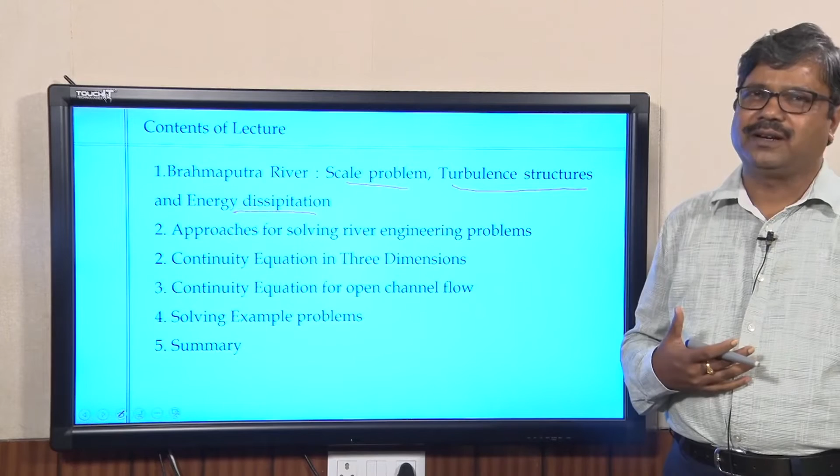Now let us come back to today's contents. We will start with the Brahmaputra river concepts, where I will talk about scale problems, turbulent structures, and energy dissipation, which are very complex processes. Before deriving the basic equations, let us learn how complex river flow is in terms of hydrodynamics, sediment transport, and nutrient transport mechanisms in a natural environment like a river.

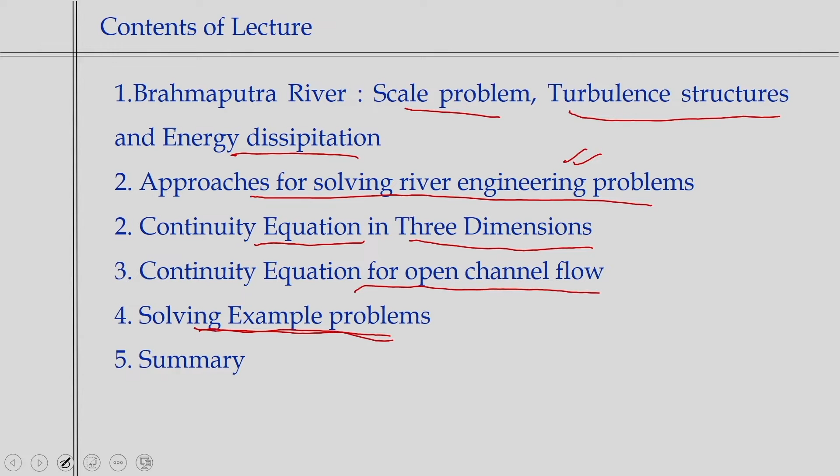That is what we will discuss in more detail, how we can solve these river engineering problems. Then there will be derivations of the continuity equations in 3 dimensions, the continuity equations for open channel flow, followed by a series of problems to give you confidence in understanding velocity fields and water depth variations through solving example problems on basic mass conservation equations.

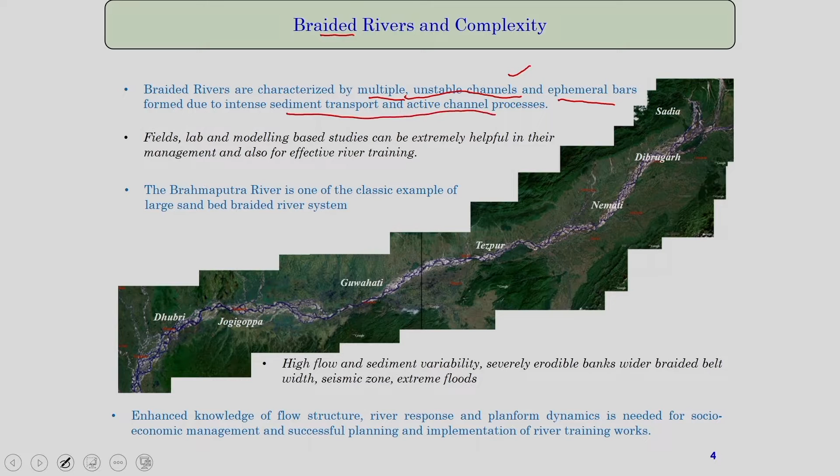Let us come back to the scale problems. We should have awareness about the Brahmaputra river, which we call a braided river system because of its multiple unstable channels, with series of bars or islands in between, where intense sediment transport and active channel processes happen. Looking at satellite data, the length of the river is close to 1000 kilometers, the width varies from 1.2 to 16 kilometers, and the depth averages 12 meters.

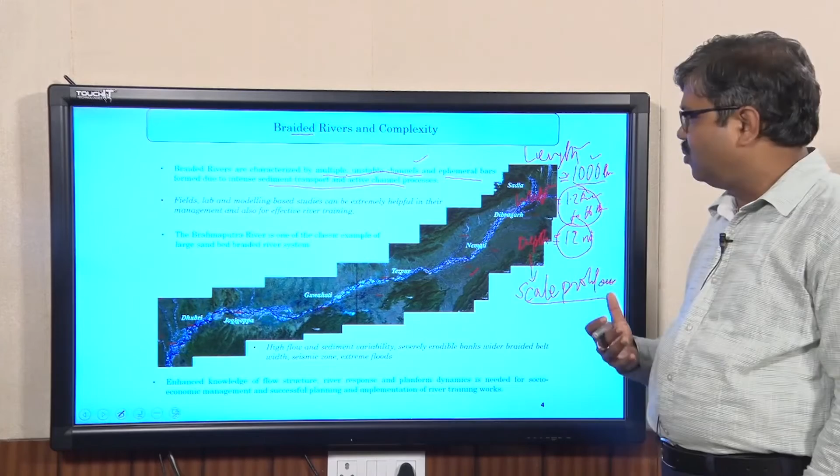So if you look at these values, the length is 1000 kilometer scale, the width is a few kilometer scale, and the depth is in meter scale. This is what we call the scale problem in river systems, because the dimensions of length, width and depth differ by considerable orders of magnitude. That's the reason we need a lot of approximations to solve these river problems. It's not simply a computational fluid dynamics problem; the major issue comes from these scale problems of length, width and depth.

If we look at classical examples of large sand-bed rivers, these figures show multiple dynamic channels with very high flow and sediment variability. That's why we should understand how these very complex flow processes happen. Again I emphasize the scale problem in river flow systems, because the length, width and depth dimensions themselves differ by orders of magnitude - that's the biggest issue.

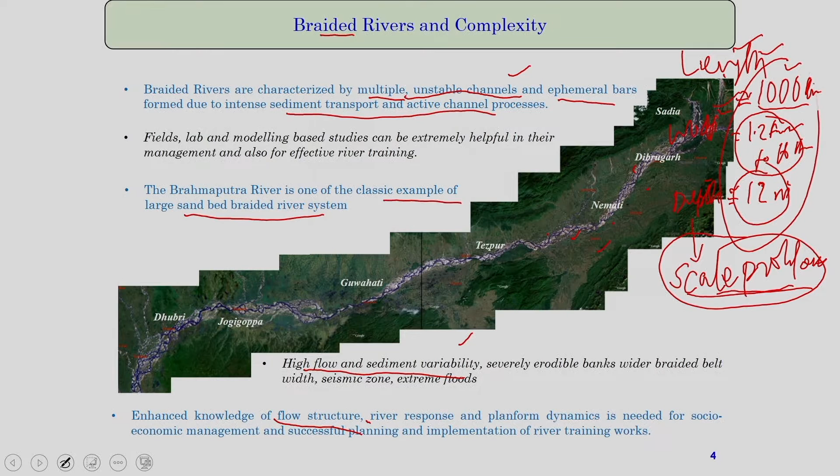Now looking at another bigger issue: if you take photographs of the Brahmaputra river during flood periods, you can see turbulent structures like vortex formations. Large vortex formations happen, including boil formations, where a vortex forms from the ground, grows, and then dissipates. These processes happen in the Brahmaputra river. Looking at a wider snapshot of photos, you can see a similar series of vortex and boil formations occurring - these are macro turbulence structures.

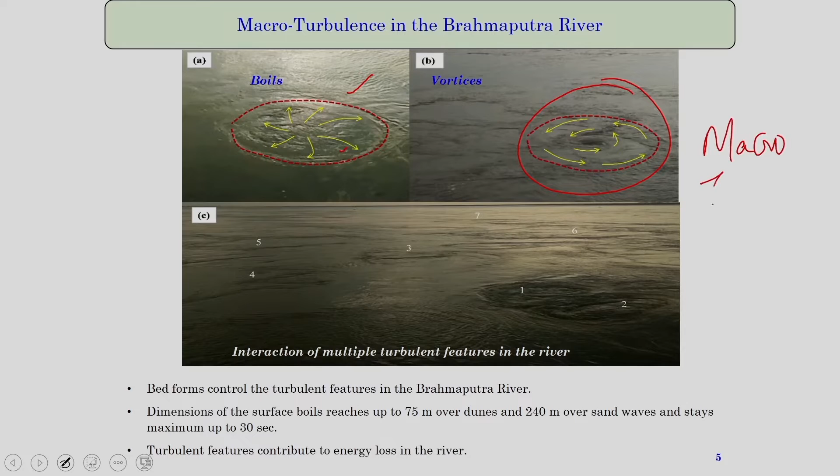These structures are also responsible for the flow behavior change, the velocity, depth, and also the change in sediment transport process. Because of the presence of boils and vortexes, this macro turbulence makes the sediment transport process different in terms of source, deposition, and transport.

These turbulent structures are visible in the Brahmaputra river during floods. They are also responsible for energy dissipation in the flow system. These macro turbulent structures are quite visible in the Brahmaputra river, but in other rivers you can also see smaller magnitudes of turbulent structures.

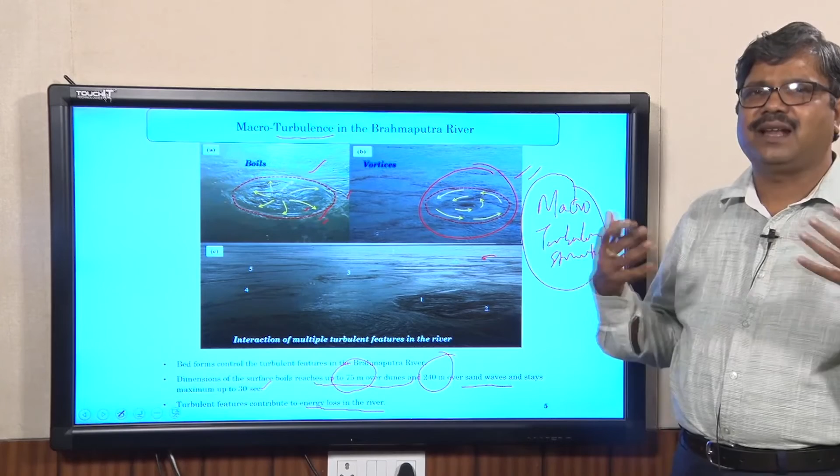Try to understand it: these structures change the flow characteristics, sediment transport mechanisms, as well as energy dissipation, contributing to energy losses in the river. That's the new concept we are introducing to you.

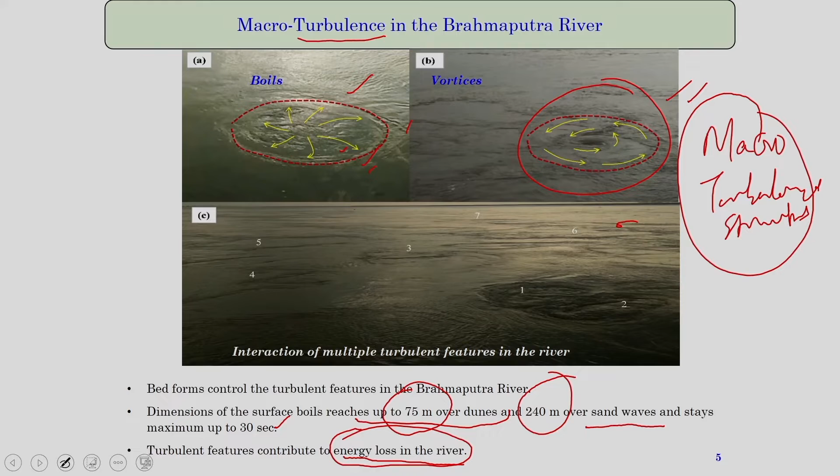This expansion and contraction also varies from season to season. For low flow, you see certain channels activated, but during monsoon high flow, different channels are active. The width expands and contracts season to season, month to month, and this generally creates major energy losses as the river expands or contracts, as known from basic hydraulic properties.

Not only that, because of the presence of macro turbulent structures—which is a major emphasis here—that also generates energy dissipation. So energy dissipation also happens because of macro turbulent structures.

The expansion and contraction losses happen as the equivalent river width expands and contracts—that's also something we have to account for.

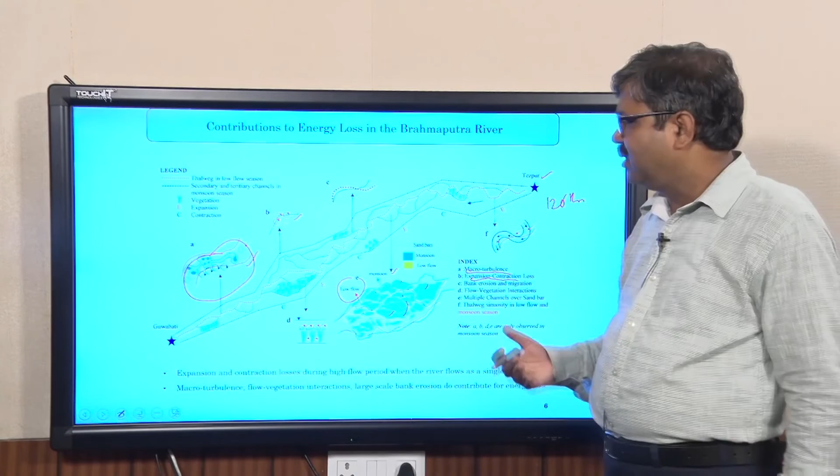Not only that, when the river belt is so large, you can have the presence of vegetation—certain grasses, scrublands, or forest. These vegetations also interact with the hydrodynamics, so you get energy losses due to flow-vegetation interactions.

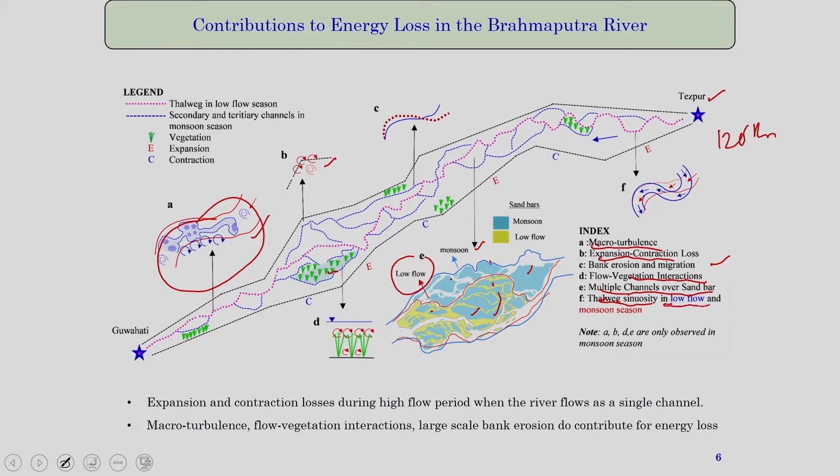There are multiple channels over the sandbars, and there is a thalweg line—the deepest point of the channel. That thalweg line also has variability during monsoon flow and low flow.

So when we talk about energy dissipation in the Brahmaputra river, it's not only frictional losses—which are well debated in many river engineering books—but beyond that, there are possibilities for energy losses due to expansion and contraction, bank erosion processes, macro turbulent structures, and the shifting of the thalweg line in low and monsoon seasons.

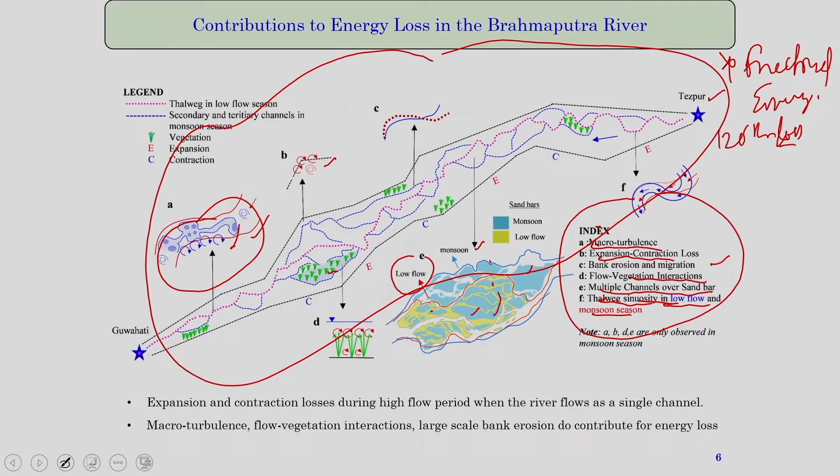This way we try to understand the river from a different perspective—how energy dissipation happens, because that controls how sediment transport happens, how flow variability changes, how it makes banks more vulnerable to erosion, and how bed forms like sandbars develop. We should have this knowledge to understand how a river dissipates energy, transports sediment, and flows in terms of velocity, turbulent structures, depth, and width.

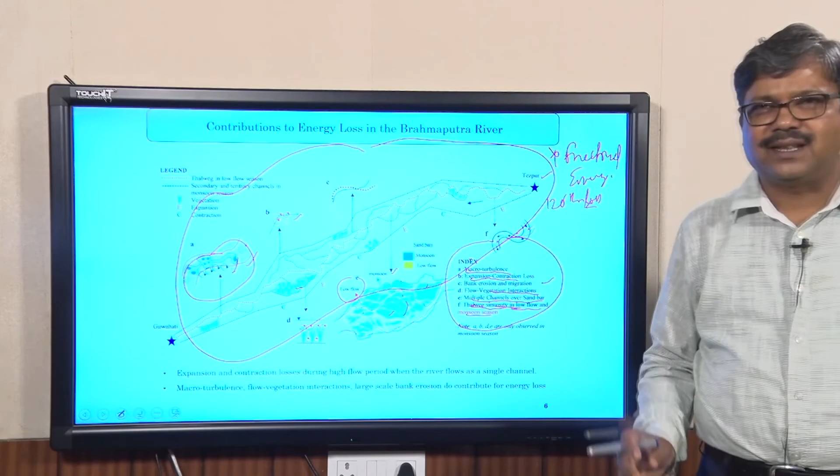Let's go to the next slide, which addresses how, when dealing with a complex river like the Brahmaputra or any natural river system, we should try to understand the river or find solutions for it.

One approach is that we can follow mathematically a set of equations, and we can solve these equations to find out the basic characteristics of the rivers like the velocity, sediment concentrations, nutrient concentrations, the depth and the pressure field. Nowadays we have more emphasis on this, but each methodology is complementary to the others - none has any superiority, whether mathematical model or physical model, all have advantages and disadvantages.

But as a river specialist, what I look at is that all these options should be considered - mathematical modeling, physical hydraulic modeling and field observations - all should be conducted to understand the rivers in terms of sediment transport, flow transport, nutrient transport, and energy dissipation.

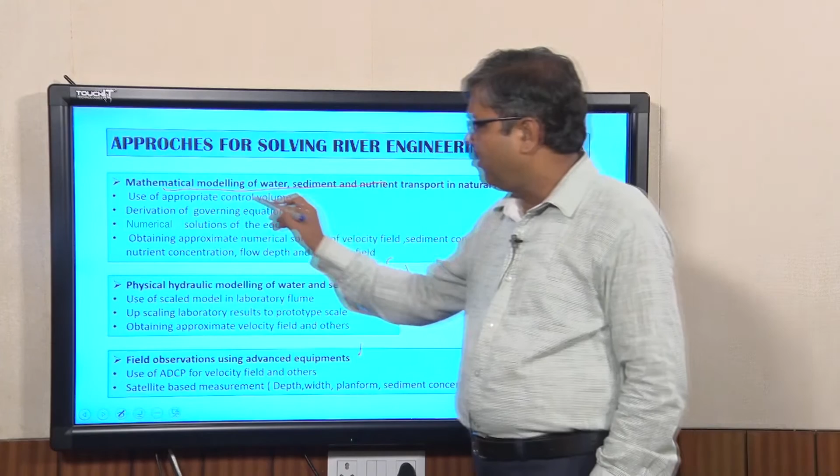What do we do in mathematical modeling? First, we find out the appropriate control volume. That's what you know from fluid mechanics. You can follow some of the fluid mechanics tips developed by me.

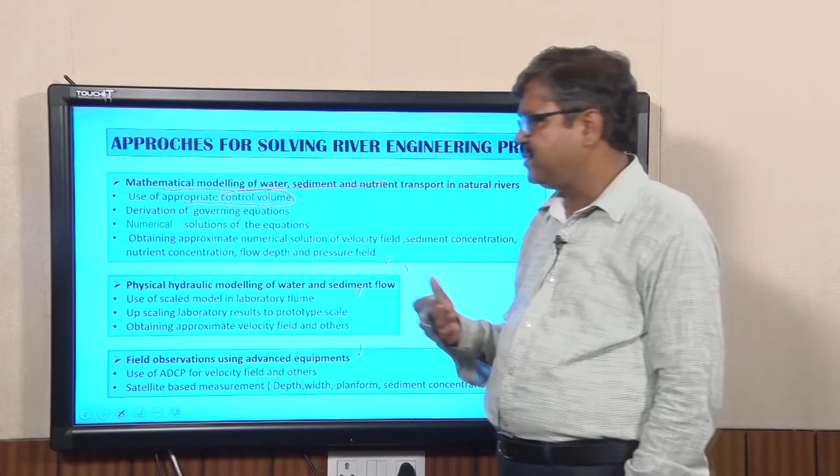We talk about more details about the control volumes, Reynolds transport theorems, how to use the control volume concept for deriving mass conservation equations, momentum equations, energy equations. These are there in any fluid mechanics book, as well as you can follow the YouTube materials by me, emphasizing how to choose an appropriate control volume so that you can solve the fluid mechanics problems.

The control volume can be infinitely small or it can be as large as the Brahmaputra river. So you can decide what type of control volume to consider to solve your problems. A control volume can be at rest or in motion, depending on what you choose to consider.

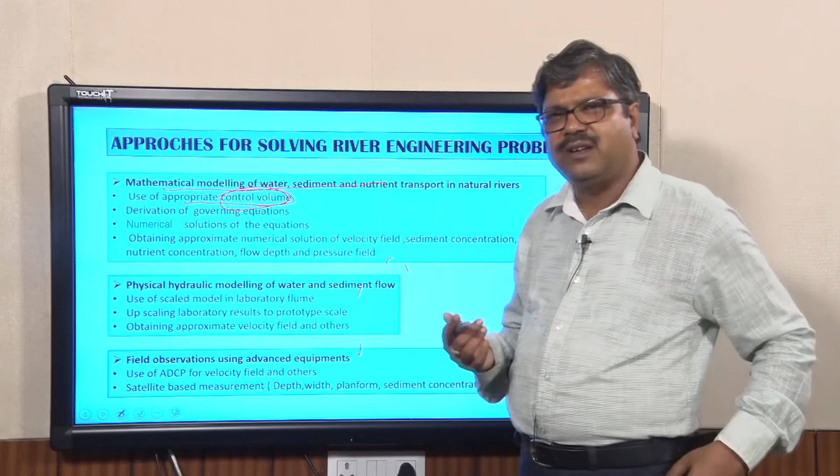After considering the control volume, you can find out the basic physical equations for mass, momentum, and energy conservation. Looking at these mass, momentum and energy conservations, we get a set of partial differential equations as governing equations, as you know in fluid mechanics.

Since these are all nonlinear equations, most of the time we start from numerical solutions of these governing equations, which today is possible. There are a lot of numerical techniques available to find out these numerical solutions.

What we are looking at with numerical solutions is that for a control volume in a study reach, we try to find out how the velocity varies - that means we talk about the velocity field. We can also find out the acceleration field, because if you know the velocity field.

Similarly, I want to know how the sediment concentration varies - as suspended load, as bed load, as wash load - how the sediment concentration variability is there. That is what I try to get as solutions.

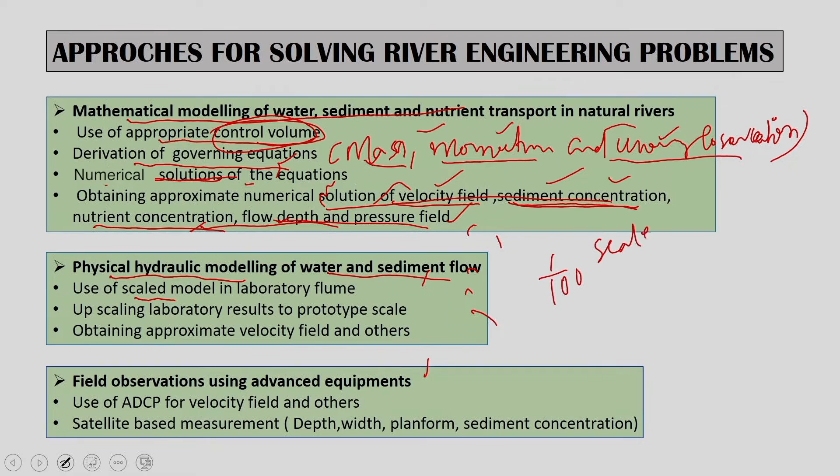This is most often how we follow fluid mechanics problems - the same version customized for river flow systems. Many times we also go for physical models for water and sediment transport. I will show some photographs later. We can have scale models, meaning you can make a 1:100 scale model, and solve these problems.

So the scale is 1:100 - 100 units of the prototype represents 1 unit of the scale model. That is how you use a scale model in the laboratory. You conduct the sediment transport flow, water flow, then you measure the velocities, water depth, and sediment transport.

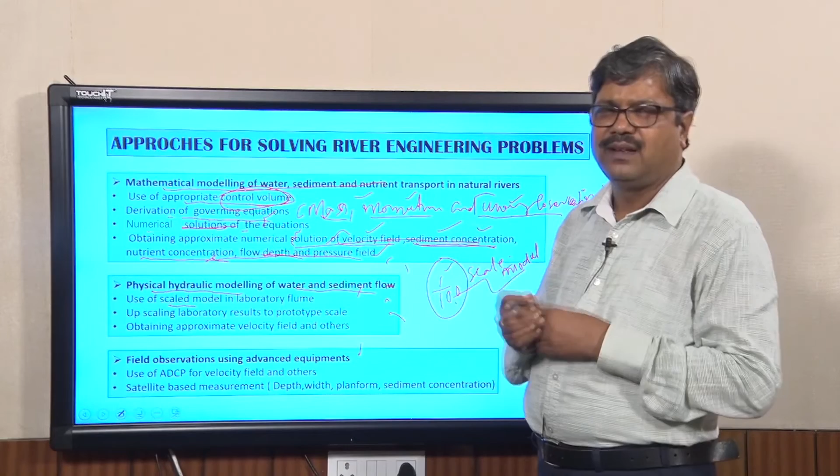Once you measure that, you can upscale it from the scale model to the prototype scale at the river scale. You can use similarity and non-dimensional numbers to upscale this data - what you measure at these flumes or small channels can be upscaled to the prototype scale. Then you get the velocity field, the depth, and sediment concentrations, all of it.

But here also we have the biggest problem with scale effect, because you scale down the models from 1:100. The major issue here also is the scale effect, as you all also know.

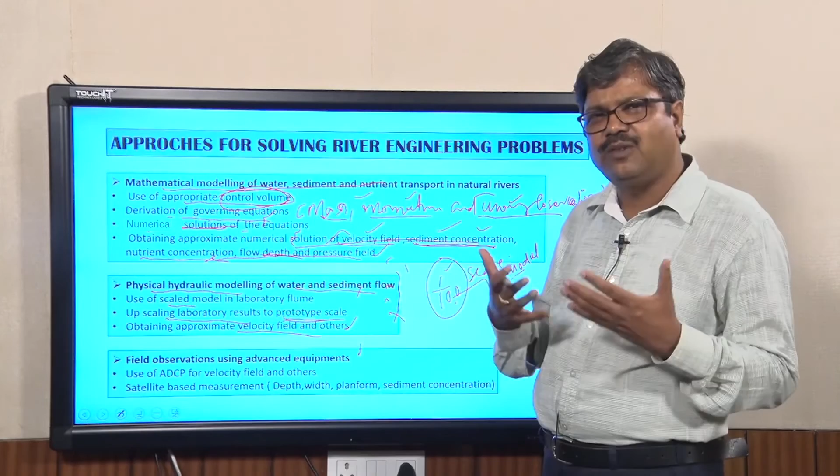It has advantages, however, disadvantages. The advantage here is that anybody, the field engineer, can have an insight into what flow is happening, and he can give appropriate suggestions to modify these physical models. So, still now there are many places we use physical models as well as mathematical models. They are complementing each other.

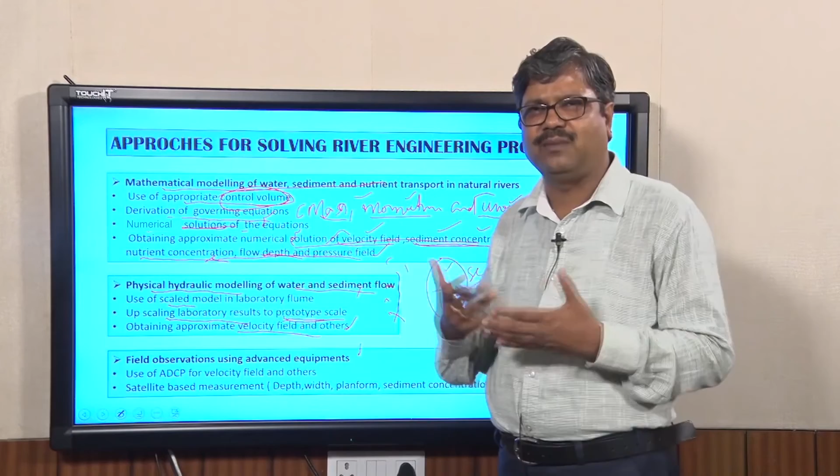But how accurate are these physical and mathematical models to real conditions? We have to have field observations. This field observation is very critical nowadays. What is possible nowadays is that we can conduct field observations with advanced equipment like ADCP, acoustic Doppler current profiler, to measure the velocity field, sediment concentrations, and water depth - all we can measure.

Those measurements of data can be used for the mathematical model or the physical model to validate whether the results we are getting from these models are accurate, whether their performance is acceptable for river engineering practice. We get confidence based on comparisons of field observed data with mathematical models, and field observed data with scale models. So that is the reason field observations always need to be done before conducting any mathematical model or physical model.

No doubt, nowadays we have another source - satellite based data - we can get the depth, width, planform, and sediment concentrations. Just time to highlight these things, we are not going into detail here. In next classes we will look at how to bring this advanced measurement of the river from satellite platforms in terms of depth, width, planform, and sediment concentrations. Some case studies I will show you in a later part of my lectures.

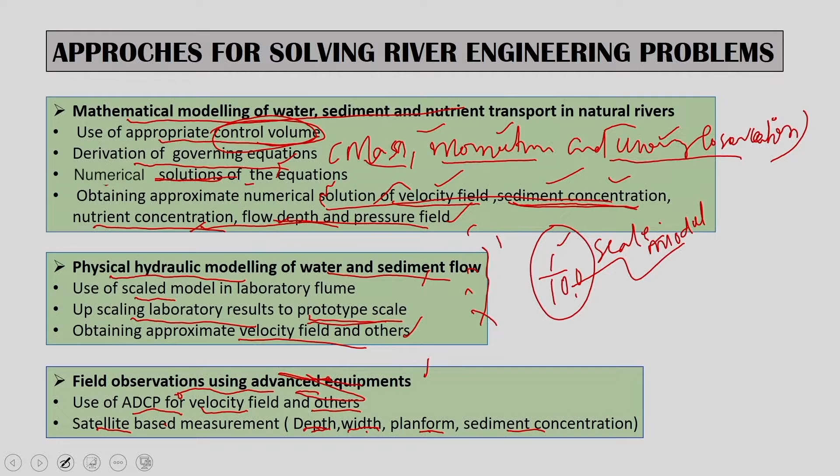Let us start to derive the continuity equation in 3 dimensions. Before that, let me talk about considering a control volume. Basically, when you try to derive the continuity equation in 3 dimensions, our control volume is infinitely small, a very small control volume we consider. We also assume the velocity field, the depth variations, area variations.

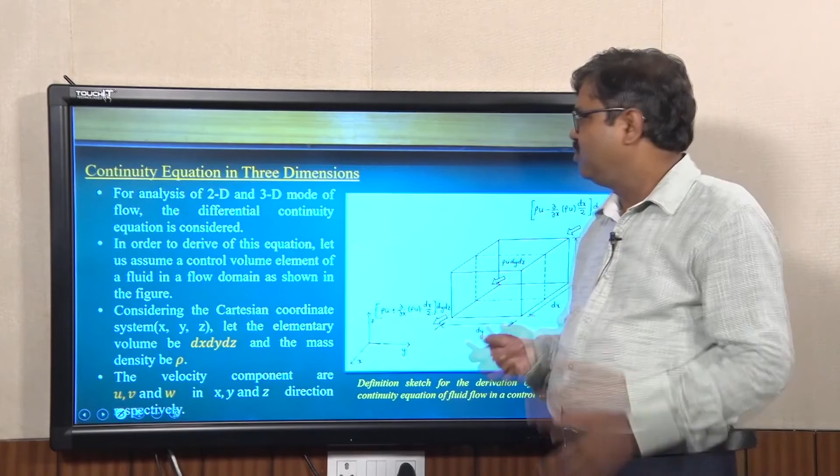If you look at this case, as we know from basic definitions, the mass flux, the mass per unit time, is equal to rho into Q, the density into discharge. It gives us the mass flux, rho u a. Here I am talking about u, the velocity component. So the discharge, you have written that. The basic concept we are using is that mass flux equals rho into Q, and if I write in terms of velocity, I have rho u, and a is the surface area. So I can compute the mass flux passing through a control surface as a function of density, the velocity scalar component, and the area. That is a very basic thing, that we can compute the mass flux.

See, if this is the control volume having dimensions dx, dy and dz - a smaller control volume - we are considering V as a continuous function, and the velocity vector has scalar components of small u, small v and w in directions i, j and k, that is x, y and z directions. These scalar components are also functions of space and time, and similarly the density is also a function of space and time, if you are considering that.

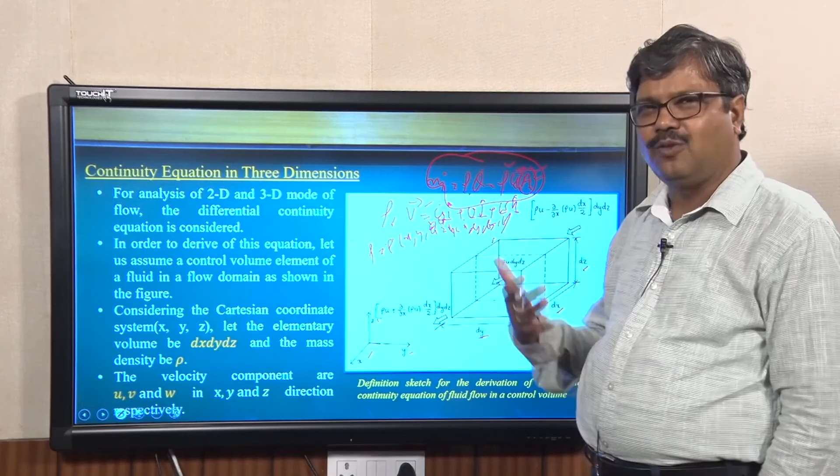But looking at this small control volume here, I just try to know what is the net mass influx going in the x direction, the net mass influx going in the y direction, and the net mass influx going in the z direction. That summation should be equal to the mass change in storage of this control volume. That is a very basic thing - influx and outflow - and you can find the net influx passing through these control volumes in the x, y and z directions, just summing up, and also we know what could be the net storage of mass happening within this control volume.

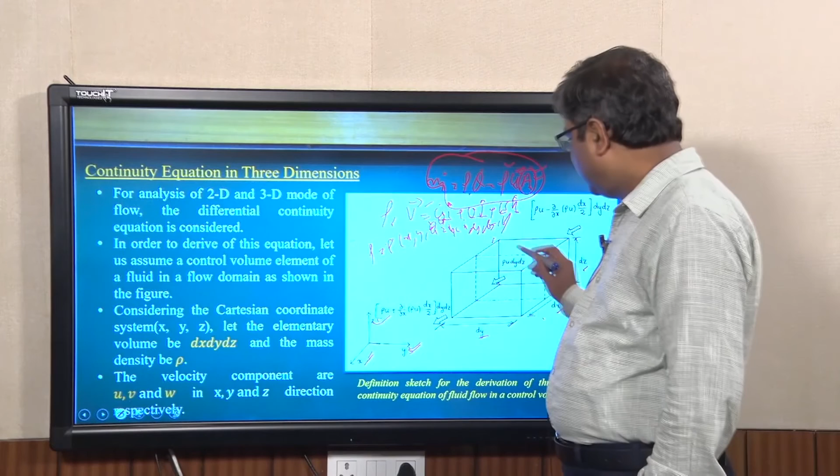That is what you equate as a mass conservation principle, and that is how we get the equations. Let us look at this derivation, considering a very small control volume with dimensions dx, dy, dz, having velocity components u, v, w in the x, y, z directions. Looking at this control volume, I am computing the mass flux.

Before computing the mass flux coming in and going out, we need to know the mass flux. We can define it as rho u, and dy dz is the surface area perpendicular to the u direction.

This mass flux varies along the x direction. Considering the first term of the Taylor series expansion, the variation of rho u over the distance dx/2 from the centroid will be rho u plus (d(rho u)/dx)(dx/2), multiplied by dy dz. This is the Taylor series expansion used to estimate the value if a function varies over a distance of dx/2.

Similarly, the mass influx at the other surface is computed as rho u minus this term, since minus dx/2 is just behind the centroid plane. So this simple Taylor series expression can be used to compute the mass flux coming in through one surface and going out through the other surface.

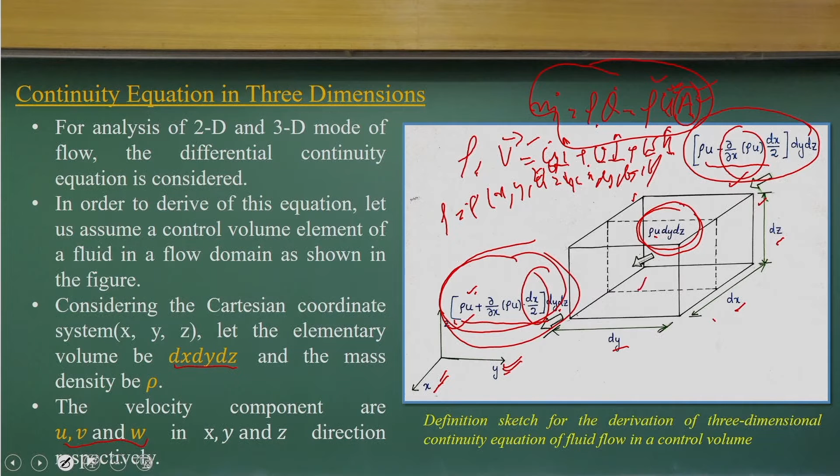Then we compute the net mass flux, which is simple: the net mass influx passing through in the x direction. Subtracting these two terms, the other parts cancel out, and combining dx, dy and dz gives us the net mass flux out in the x direction through the two surface faces.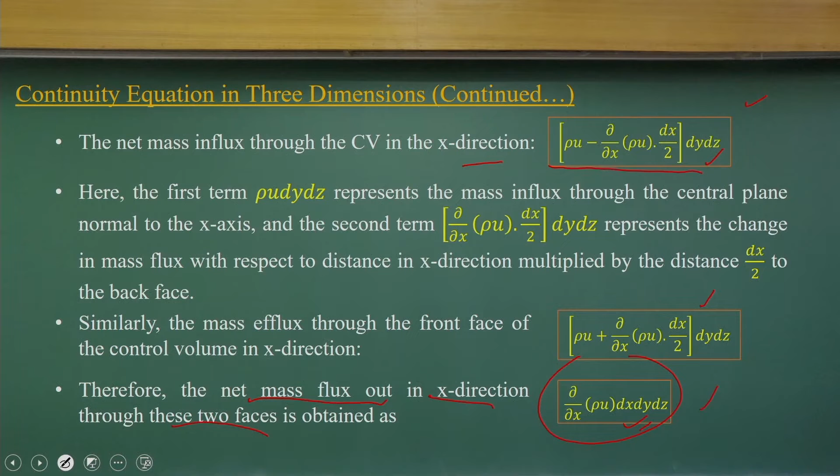The same procedure applies for the y and z directions. Combining all three, the net mass outflux consists of the x direction term, the y direction term, and the z direction term, multiplied by dx dy dz, giving the net mass influx in the x, y, and z directions as functions of rho and u, where rho is density and u is the velocity component in the x direction.

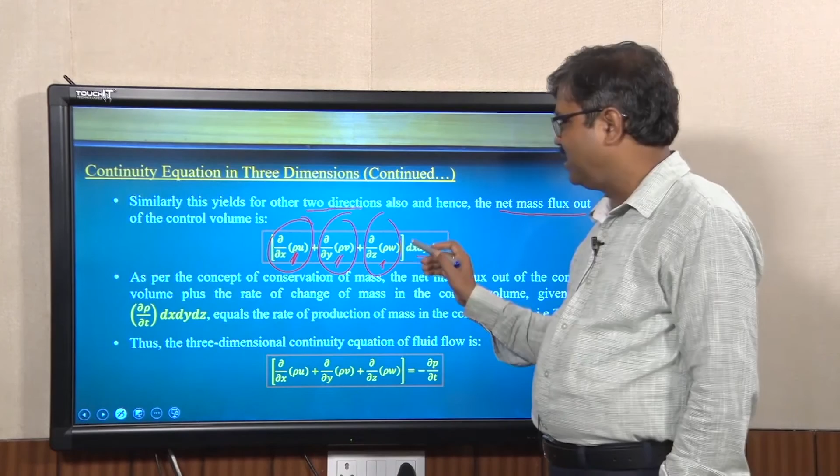Similarly, rho v is the scalar component in the y direction, and w is the component in the z direction. So we get the net mass flux out of the control volume. Based on the mass conservation equation, this net mass outflux from the control volume becomes zero, and the net mass change within the control volume is rho times the volume.

That gives us del rho by del t, the rate of change of mass with respect to time, which equals rho times the volume. Looking at it, the change with respect to time, del rho by del t, gives the rate of change of mass in the control volume. Equating these, we get these equations.

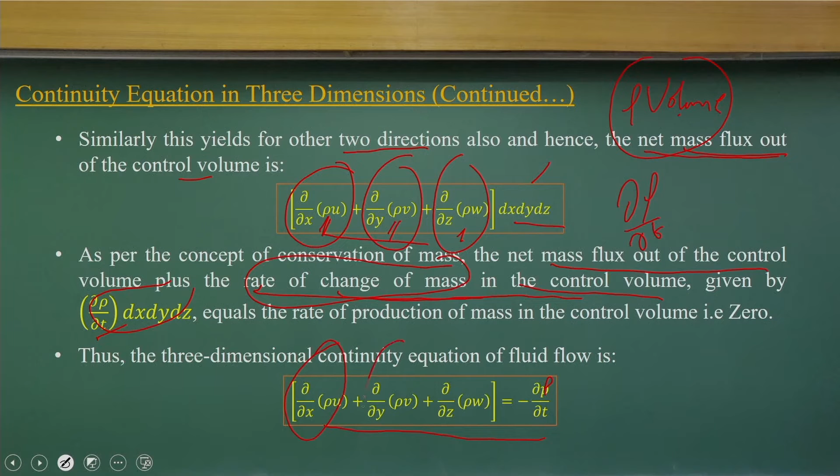Looking at this equation: this is the net mass influx in the x direction, the net mass flux in the y direction per unit volume, and the net mass influx in the z direction per unit volume. This is the net storage mass, the rate of change of mass storage within the control volume, represented like this.

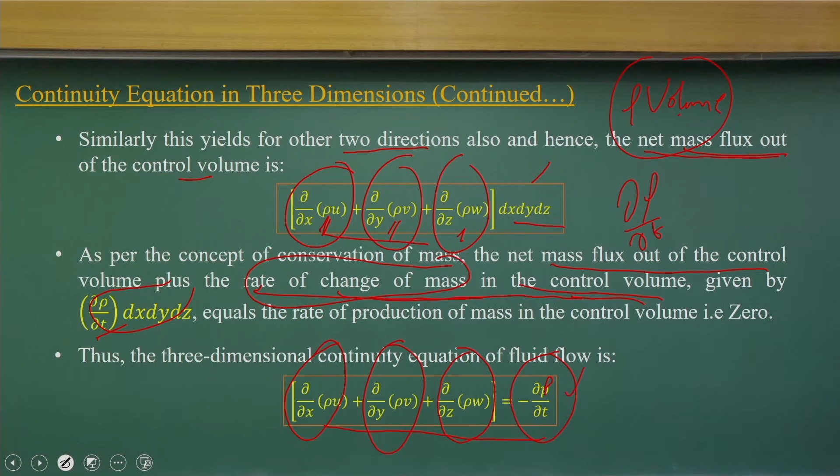Looking at the next part, many times we assume the fluid is incompressible, meaning density does not vary. But this may not hold for river flow. In fluid mechanics we often simplify by assuming density does not vary, but as discussed earlier, the sediment-water mixture density can vary depending upon the concentration.

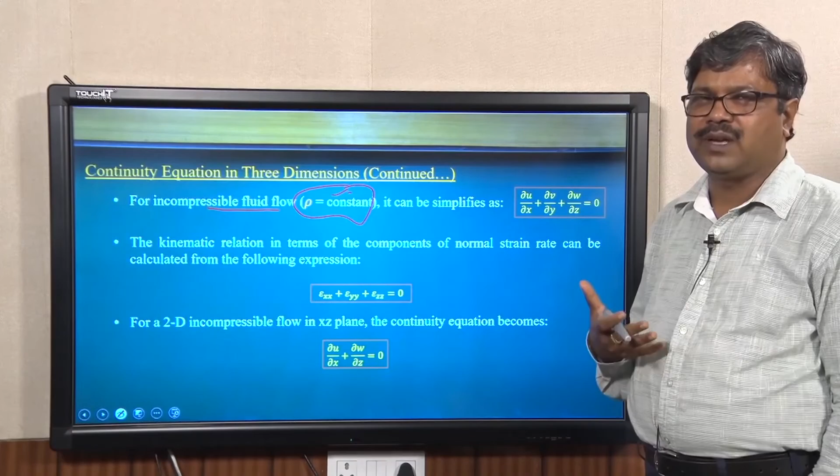We cannot consider it as constant parameters, but if you consider a constant parameter as water flow, and there is no significant sediment transport happening, we can simplify the equations found in any fluid mechanics book. That is what becomes the steady flow assumption, where the flow does not change with time. If rho is constant and does not vary with time, that is steady and incompressible flow.

Again I want to highlight there are a lot of assumptions involved here, and when you solve river engineering problems, please check whether these assumptions are valid for your case.

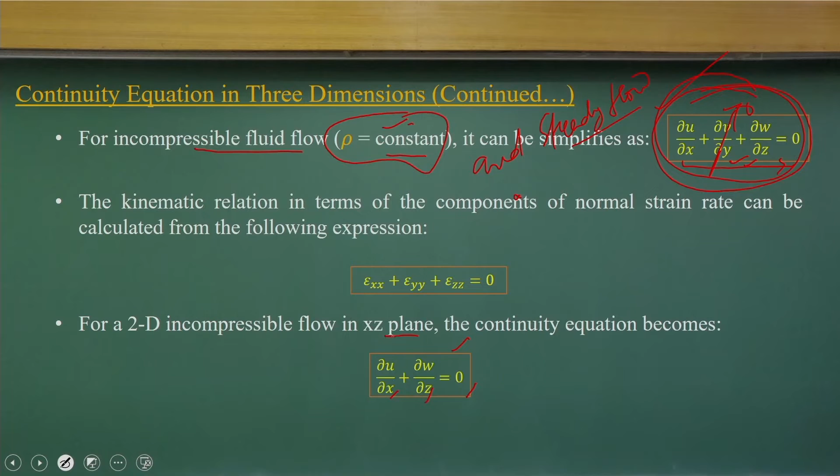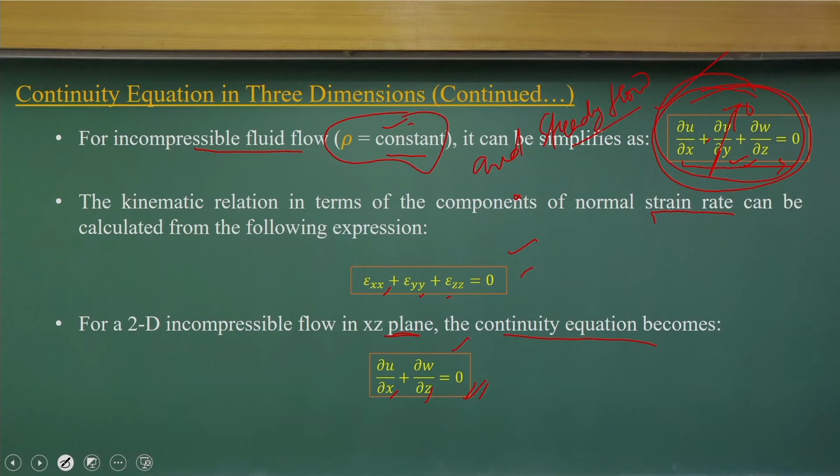If you have two-dimensional flow in the x-z plane, you can drop certain components and have flow fields only in the x and z directions. So for two-dimensional flow in the x-z plane, the continuity equation becomes this form found in fluid mechanics. In terms of normal strain rate, we can write it in this form - look at some fluid mechanics books to understand that part better.

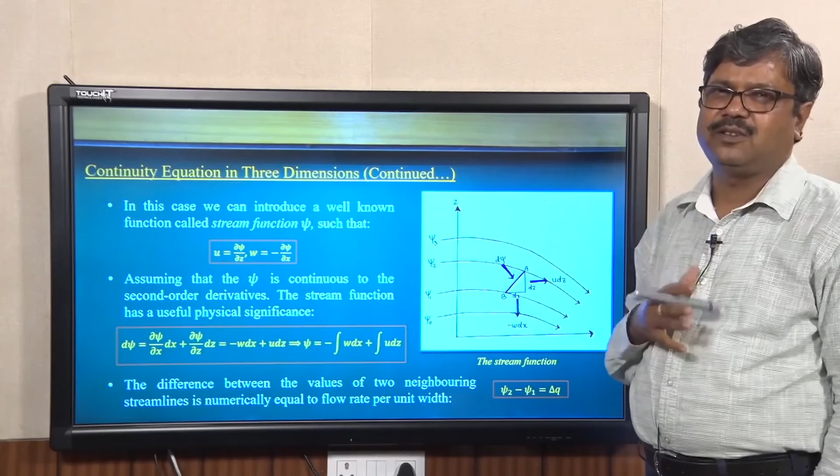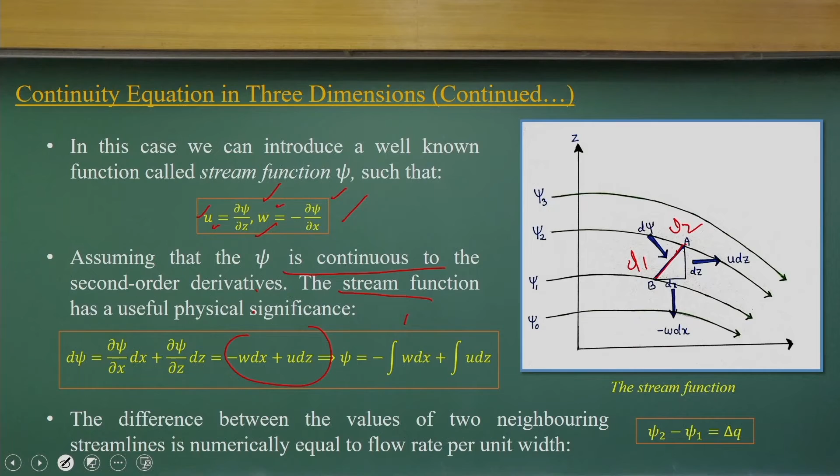Often we use stream functions. When you look at a river from the top, you see the plan form, and if you draw the streamlines, you can solve these problems. That's why I'm introducing streamlines, which are very basic in fluid mechanics. The relationship between stream function, u and w is given like this, and the change in stream function is continuous to the second order derivative. If you put in these values, you can find the stream function values, and the difference between two streamlines, say psi 1 and psi 2, gives the net flow passing through them. This is a basic revision of fluid mechanics concepts; stream functions can also be used for river flow.

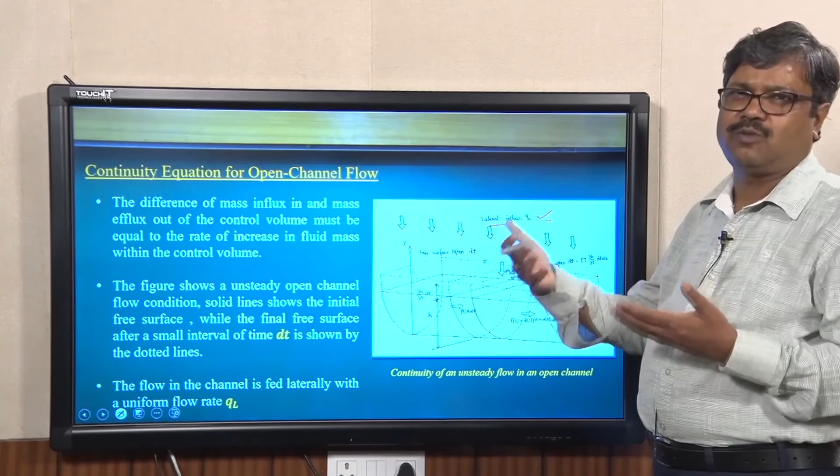Let us come to the continuity equation for open channel flow, moving from fluid mechanics to open channel flow when considering a river. In case of rivers, there will be lateral inflow to the river. If you look at this control volume, there will be lateral inflow or outflow, depending on surface rainfall or evaporation going out, or exchange between surface and groundwater - sometimes river water goes to groundwater or groundwater comes to the river.

When you consider rivers, there is exchange of water between river and groundwater, and also exchange with the atmosphere, from river to atmosphere or atmosphere to river as rainfall. That's why we say lateral flow happens to the control volume. There is a QL amount of lateral flow that is fed laterally at a uniform rate. This is a simplified assumption that QL doesn't vary with time, but within this control volume we consider Q to be more or less uniform.

Now if you see these figures, this is the control volume, this is the river shape, and that is what we call unsteady open channel flow. The solid line shows the initial condition at t equal to 0. At t equal to delta t, the surface becomes a dotted part - there is a change of flow depth, a change of storage, and a change of velocity field from the initial time step to delta t.

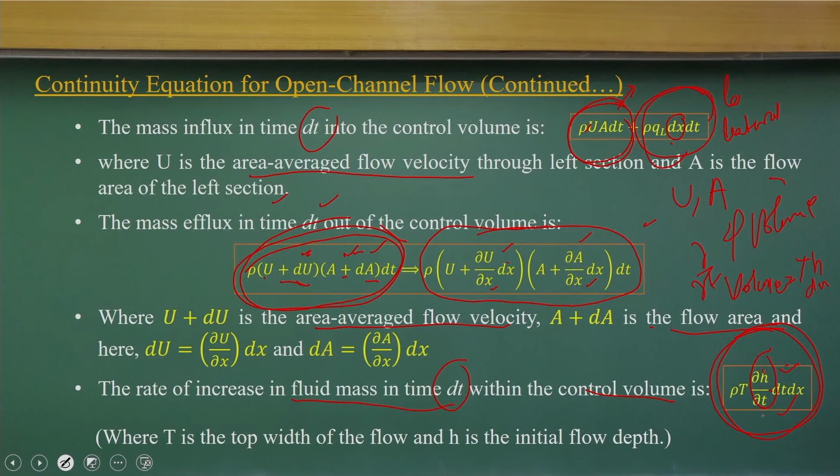In this case we write the volume in terms of T, the top width, h, and delta x. Since h is varying with respect to time, the delta by delta t component is there. That is the mass rate of change of fluid mass in delta t time. So I know the influx, I know the outflux, I know the change, I just have to equate these to get the basic equations.

So the influx part, the outflux part, and the net change of mass within this control volume, which is the open channel control volume with lateral flow of QL per unit length, gives us these equations, which is just the mass conservation equation of influx, outflux, and change in mass within the control volume.

If you simplify these equations, it comes out like this. If you write Q equal to U into A, where area is top width and depth H, then this equation simplifies further as a transport equation: the partial derivative of Q in the x direction, plus area with a time derivative, equal to QL. Remember it is a mass conservation equation, but when written in partial differential equation form, it comes in terms of the gradient of Q in the x direction, and the A variable, equal to QL. You can substitute the units of all these terms to verify they are correct.

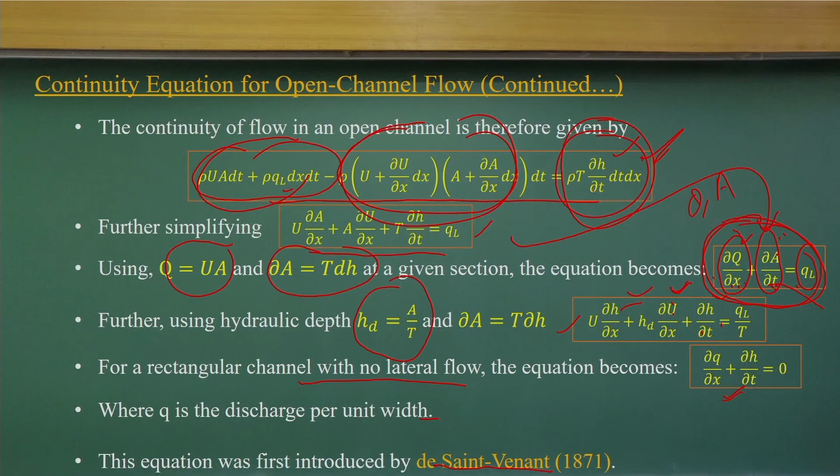But all these are derived equations from the basic mass conservation equations, which I will show you again using the basic control volume. To understand it always, try to sketch the control volume.

If you try to sketch the control volume and find out the mass influx and outflux rate, write a mass conservation equation to solve these problems, you need to know what are the dependent variables you are making it, or what are the flow variables you are considering for these control volumes.

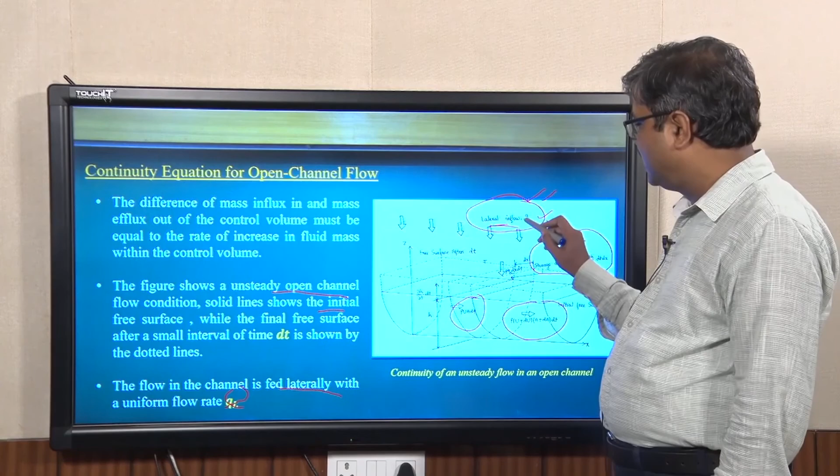For example, in this case we consider the river as an open channel flow with lateral flow we have given emphasis to, there will be a lot of exchange of water to and from the river, that is what we define as lateral flow.

Here the mass influx we define in terms of rho into U, where U is the area-averaged velocity component, looking only in the x direction. So we are not having a 3-dimensional case, just looking at space in the x direction and time. So you compute the influx and outflux of rho into U, and compute the change in storage.

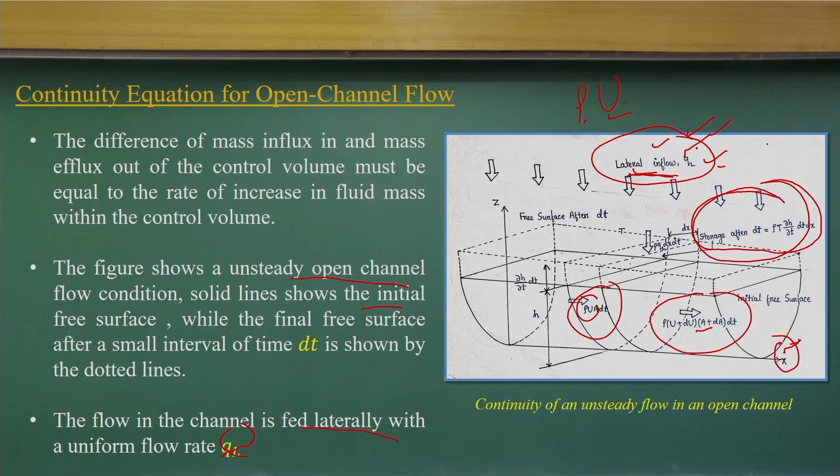So the basic approach is: first you choose the appropriate control volume, find the influx and outflux, and the change in storage of mass within the control volume, and equate it. The equation may be a partial differential equation, but the basic concept is mass conservation applied to a control volume, like for a river where we consider the longitudinal direction as dominant, as well as the lateral flow part.

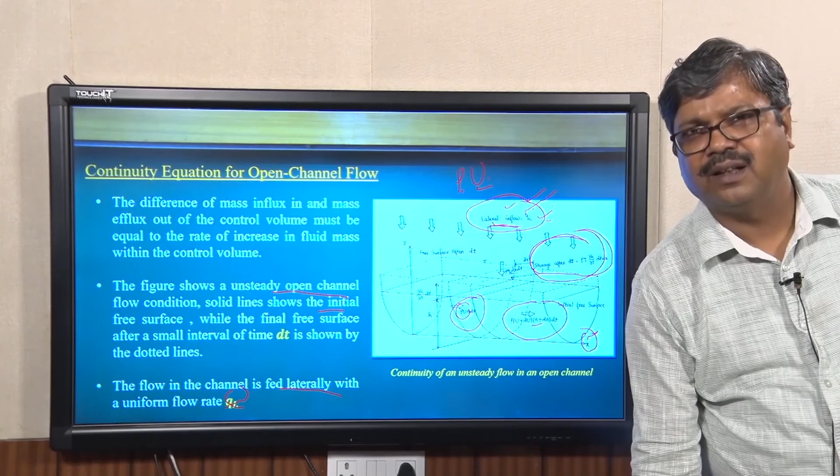Before concluding, let me give a few examples to build confidence, where we try to find out the velocity fields when we solve these problems. For example 1 in fluid flow, you have a velocity field and density field given as a velocity vector and density as a function of space. Does it satisfy the flow continuity equation at x equal to 1 and y equal to 1?

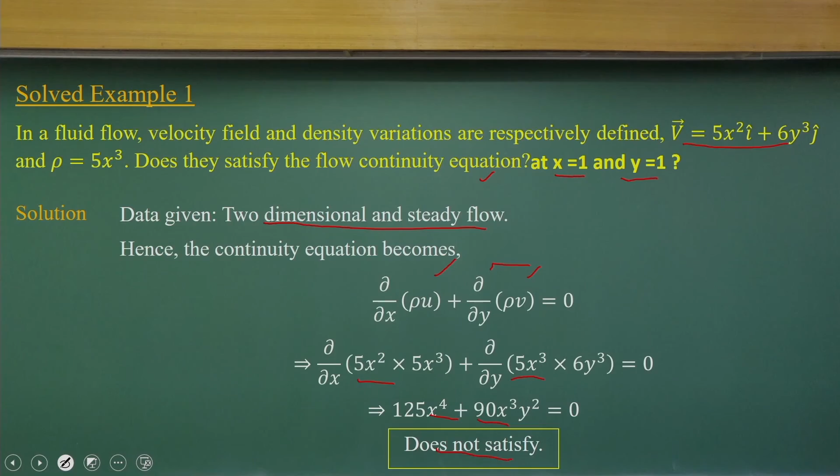This is simple since only x and y are there, time is not involved. So we find the two dimensional flow equation, mass conservation equation with rho and u. This is the two dimensional steady flow equation; substituting these equations, finally you get an equation, and substituting x and y, it does not come to 0. That means it does not satisfy. So this shows that many times you can use analytical functions to find out whether they satisfy the continuity equation or not.

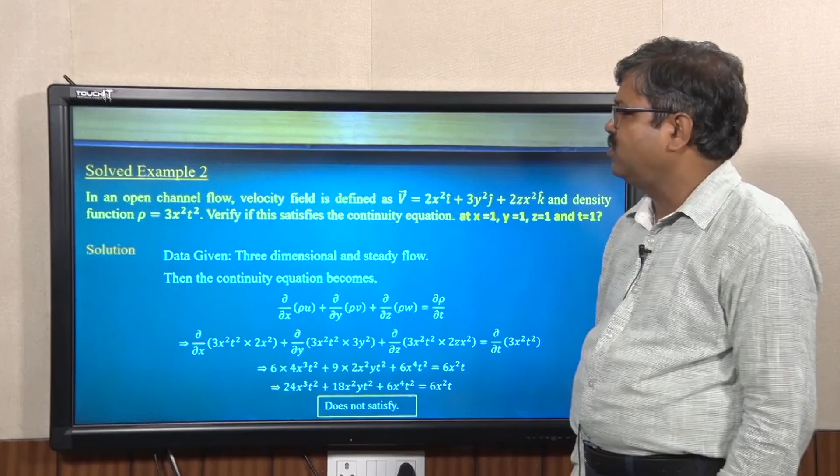Same way, the next solved example in open channel flow: the velocity field is defined with x, y, z components as functions of x, 2x square, 3y square, 2zx square. Density is given as a function of 3x square t square. Does this satisfy the continuity equation at x, y, z equal to 1 and t equal to 1?

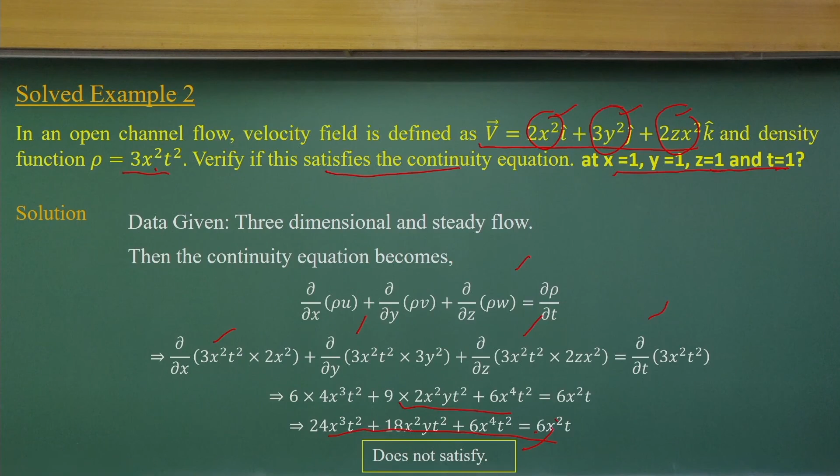So again we use the continuity equation, substitute all these values, take the partial differentiation of this equation, then substitute. Finally, when you substitute x, y, z, t into this equation, you find it does not satisfy the basic equation for x equal to 1, y equal to z equal to 1. So this does not satisfy it. This is a very simple example to give you the idea of how to check whether you can solve this problem.

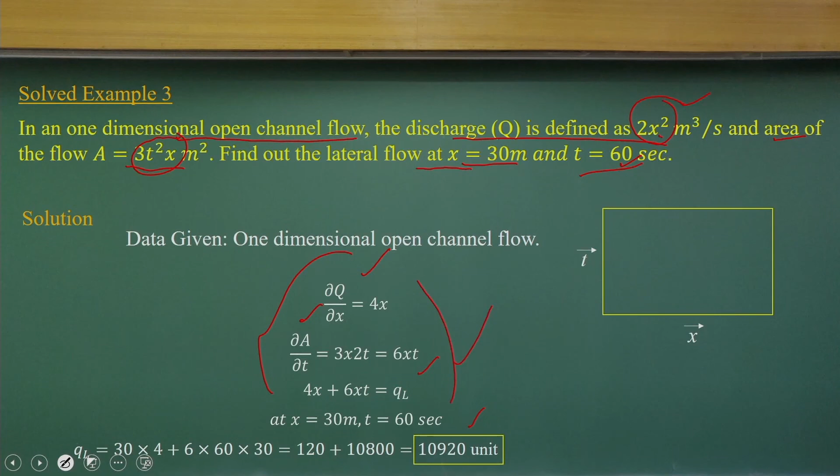With this, let us complete today's lecture. We will discuss a few more examples as well as the momentum equations in the next class.